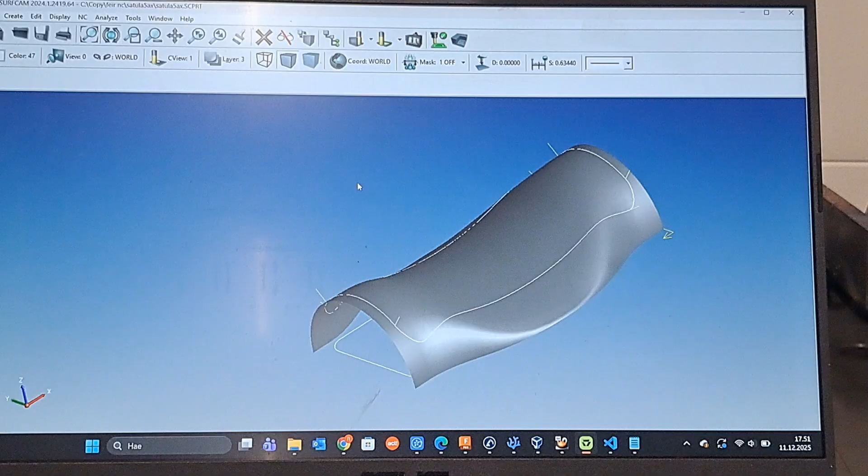This video is about Surfcam making the moves to Fairino Cobot. As you see, here's a saddle surface and a spline. The straight line shows positions for the tool and all. Here we make the toolpath in Surfcam in real time, and then we just post-process it to the code for Fairino.

This is the post-process. You give it a name, some name you can use in Fairino, and there's some parameters we have to set up, speed, that kind of things. Now it's pretty slow, so we can see.

And the Surfcam post-processor made by Renzi creates two files. It makes the trajectory file, which is all the axis coordinates, and a Lua file, which determines firstly all the conditions for running the trajectory file, so the movements in the space.

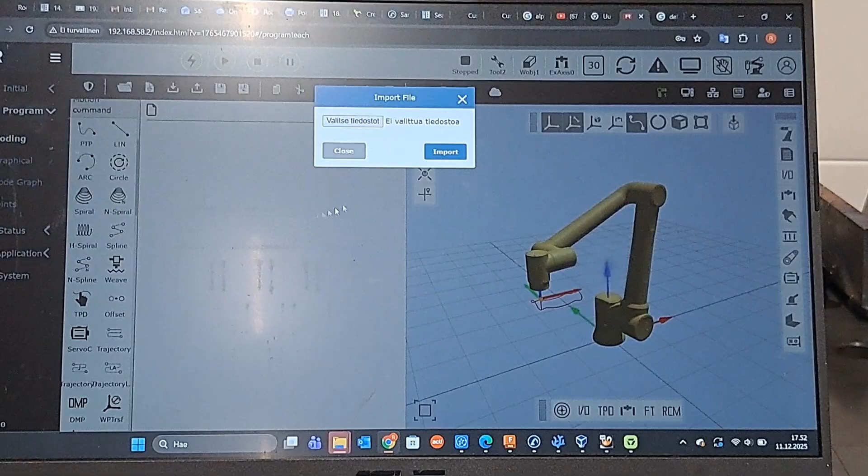Now we have opened up the Fairino console, and we read in firstly the Lua file, which is saddle, or satula in Finnish. Once more, like this. And okay, now we get it.

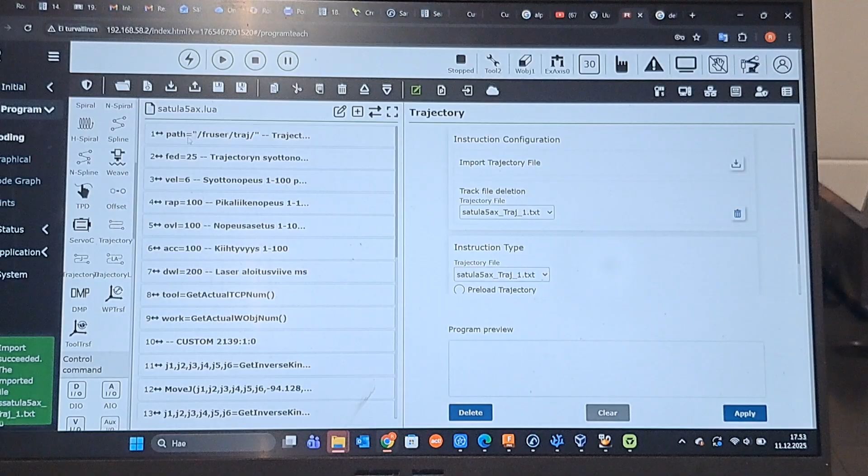And we find the place for the trajectory file. Here it is. Open the trajectory file, and we have it in here. We can simulate it on the screen first before running on the Cobot.

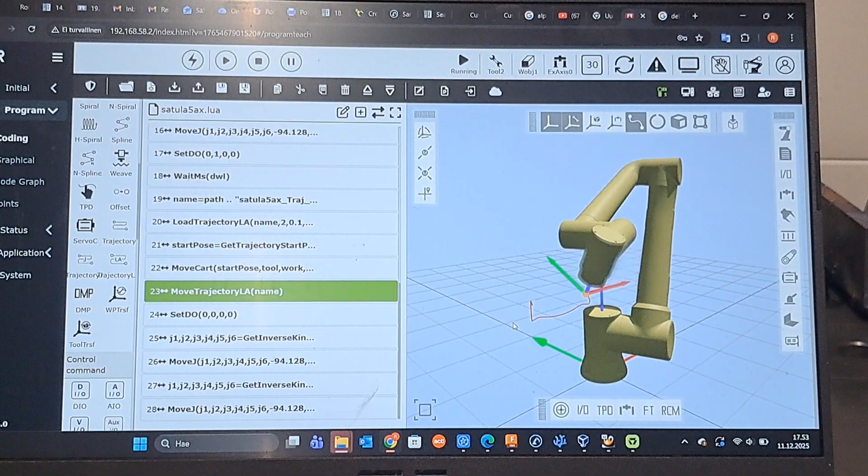As you see, let's just zoom it out. The movement is the same as it was in Surfcam. As you see, the simulated path, it comes and goes, moves on this imaginary saddle surface.

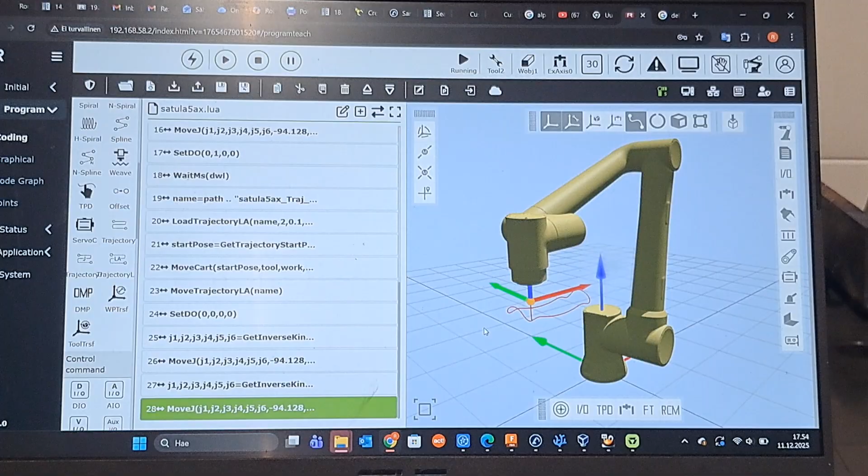And here we go. Now it's 90 degrees towards the surface, but it can be in any angle towards the movement, so you can make like two paths, firstly towards and then in some angle, like for plasma cutting, to make welding seams.

So now we run it for real. Firstly, it starts on the saddle. As you see, the movement doesn't stop and it's very smooth and continuous at the same speed.

No vibrations. It's really a smooth and vibration-free movement, so it's perfect for gluing, plasma cutting, especially complex shapes. Also for trimming, if you have a very light milling spindle, you can mill some soft materials. Thank you.